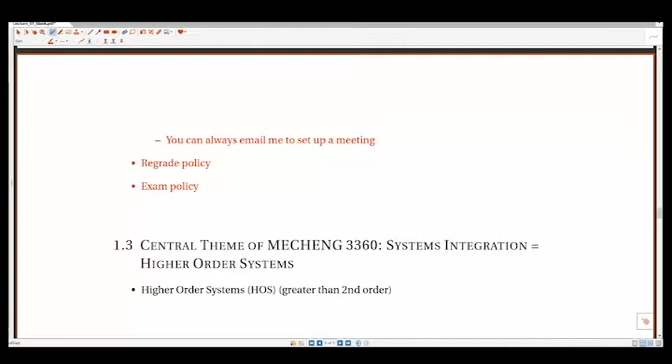The focus here is a little bit different. We're oftentimes talking about orders of systems greater than second order, and we're also talking about multiple systems interacting with each other, which is going to inevitably blow up to like 6th, 8th, 10th order systems. We're going to stop focusing so much on what is the exact solution to that differential equation, and focus more on general ideas of behavior for the system. That's going to be the major transition.

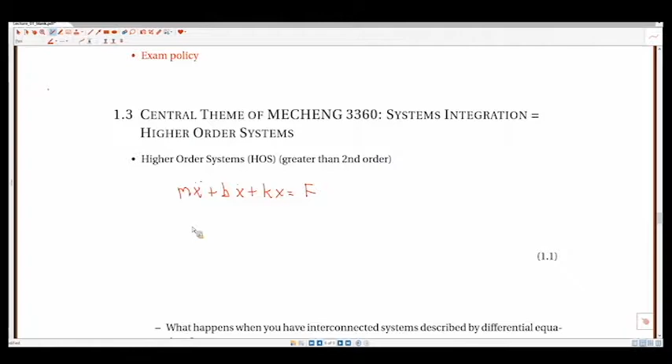So when we talk about higher order systems—if we have a second order differential equation, say for instance a mass spring damper, like this—this would be a second order differential equation. We're going to be talking about differential equations that are of higher order. So say, for instance, we have a bunch of coefficients and then also orders of differentiation with respect to time, and also higher orders on the input as well, which we could have... not what I want to say.

Okay, so for instance, this would be an nth order system. This would be a_n times the nth derivative of x, plus a_(n-1) times the (n-1)th derivative of x, all the way up to the 0th derivative of x. So looking at higher order systems, as the system goes up in order, it gets much more difficult to solve the differential equation by hand.

At a certain level, for the sake of an undergraduate class and the time allotted for quizzes and tests, it's possible to do by hand. But we're not going to focus so much on solving this by hand, but on looking at more or less how they behave, and coming up with descriptors so we can understand how systems behave.

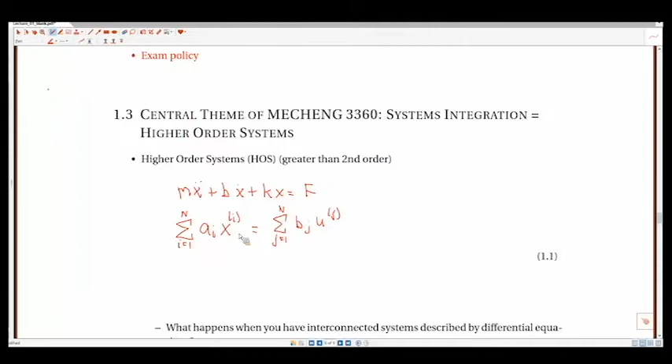Also, we're going to have interconnected systems. Say, for instance, we have the system described by this differential equation. We'll call this 1, where we have the output x. This is what we would normally solve for in a differential equation, dependent on the input. But we're going to complicate things, and we're going to have the input also formed by a differential equation.

K equals 1 all the way up to, say, uppercase K. And this is going to be a sum of some sort of function in time and also the output itself.

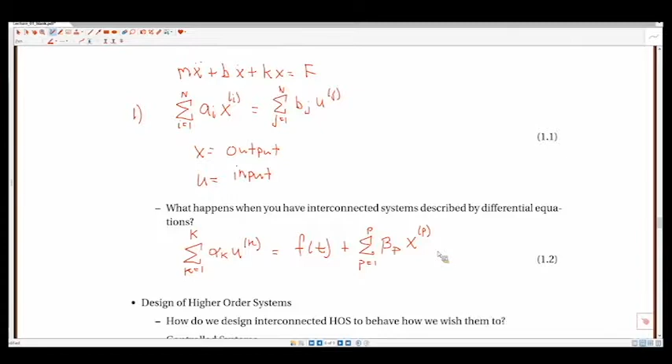Okay, so briefly what we have here: we have system A, which we can describe by its input and output. We'll just call it system A, input of U, output of X. We now have system B, which has two inputs: it has this forcing function F, and it also has X. And then this becomes the input to system A.

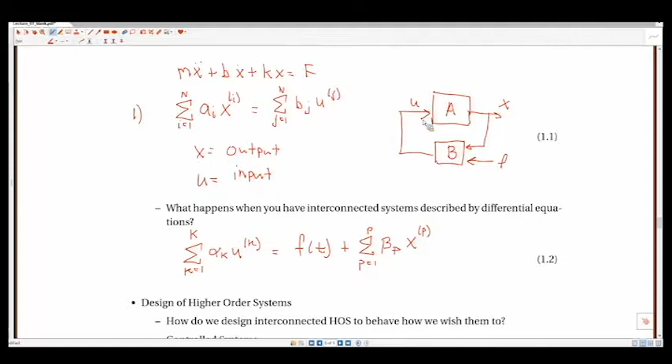So we're going to try to understand how these systems are all interconnected or integrated. The name of the class is Systems Integration and Control, and how do we make sure these systems, when all put together, behave in a favorable manner? How do we design interconnected higher order systems to behave how we wish them to?

A simple example is cruise control. I'll get to this in a second—in the last 5 minutes we'll talk about cruise control. It's probably not the simplest example, but it's one you're all probably familiar with, of multiple systems working together to achieve some objective. So who has a good idea of how cruise control works? How does it work besides just pushing the button and it goes? What's actually happening under the hood?

Yes, in the back. Just walk me through the steps of what the individual parts of a cruise controller do. Sure, okay... Right, so just to make sure I heard you correctly, you're talking about how much vacuum the engine has, is that what you said?

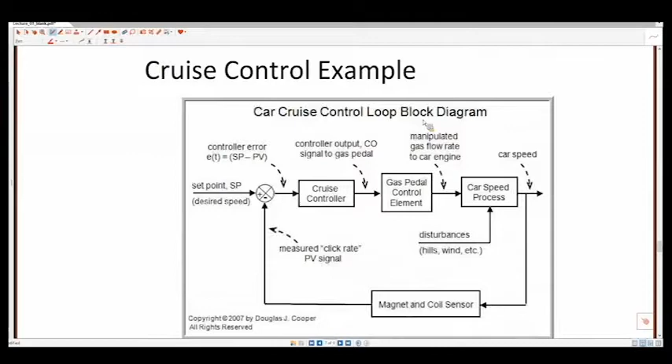Okay, so what's your name? Connor. So what Connor described is that you have some sort of sensor on the system—that was the first thing he talked about, a sensor, and this is a speed sensor. You have a speed sensor in your car, so your car has an engine control unit, and it needs to know how fast your car is going if it wants to do cruise control, so you have a sensor for this.

For all intents and purposes, this acts like an algebraic equation, but strictly speaking it's actually a differential equation—sensors have dynamics to them. Basically, you have a system that measures what your speed is, so you have an actual speed of your car, which is more of a notion. Your car is going down the road at, say, 65 miles per hour because you're a law-abiding citizen on the highway, and you have a sensor which measures that—it may be a good measurement or slightly off, but anyhow, that's the best information you have about the speed of the car.

You also have your set points. So your set point, we'll call in this class a reference, and this is what is your desired speed of your car. In the engine control unit, as described, you're always comparing the set point to the measured speed.

So this is, in terms of block diagram form, this is time. Your set point would be 65 miles per hour, so you don't get pulled over.

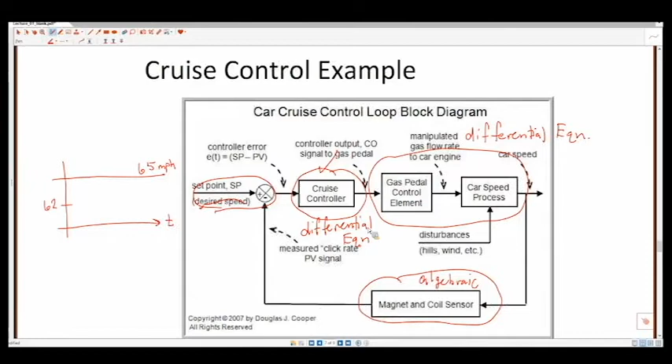So unfavorable would be if you, as a personal cruise controller, saw a 3 mile per hour difference in speed, and your reaction was to slam on the accelerator as hard as possible. That'd be a very bad decision. You would never do that, but we could accidentally make an engineered system do that.

And if your reaction was like, oh, I'm going 10 miles per hour too fast, hit the brakes, you're going to have a very dangerous system. So we need to make sure that we're having systems that respond in a favorable manner. That means transitioning between speeds in a very smooth manner.

We're going to talk about this in terms of pole locations and oscillations in our system. You don't want a cruise controller that's just always going above and below 65 miles per hour. So more of that on Wednesday.